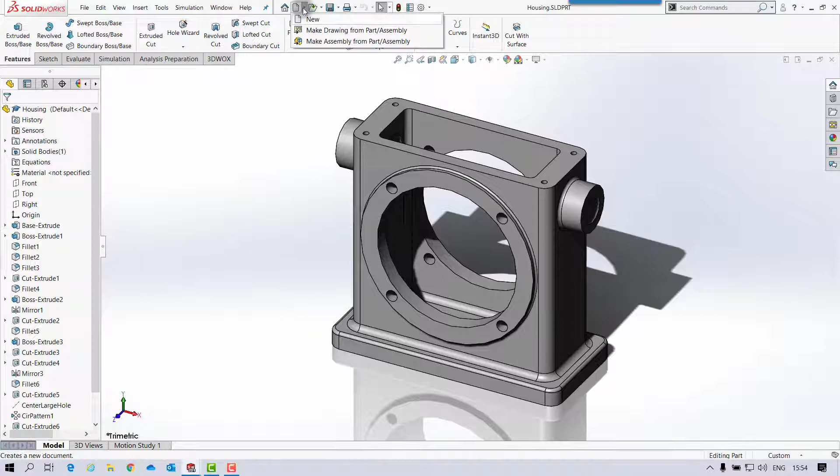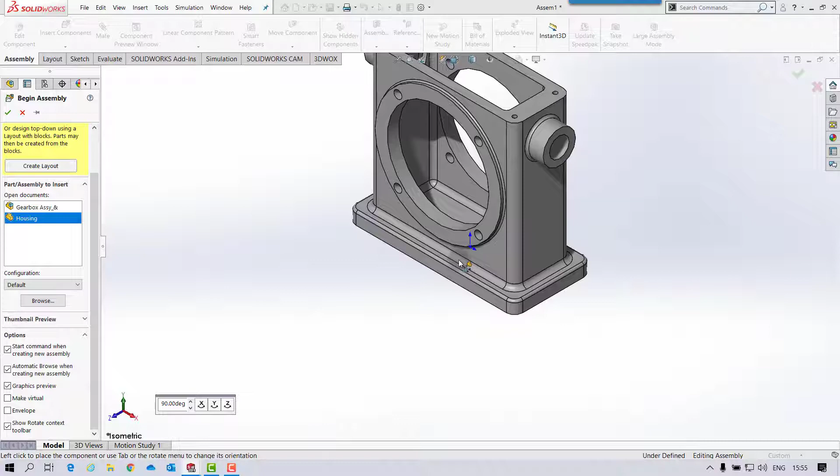Exercise 56 on page 455. Here we have to open up the housing part and create a new assembly from that part. So I've opened it up and I'll make an assembly from part. It's a metric assembly, so in the SOLIDWORKS templates tab, click on assembly mm. Now you'll notice I can't see the part, so I'll turn on the graphics preview, which is actually turned off in this particular template. You can click on the check mark and insert the housing in there, and it's fixed at that location.

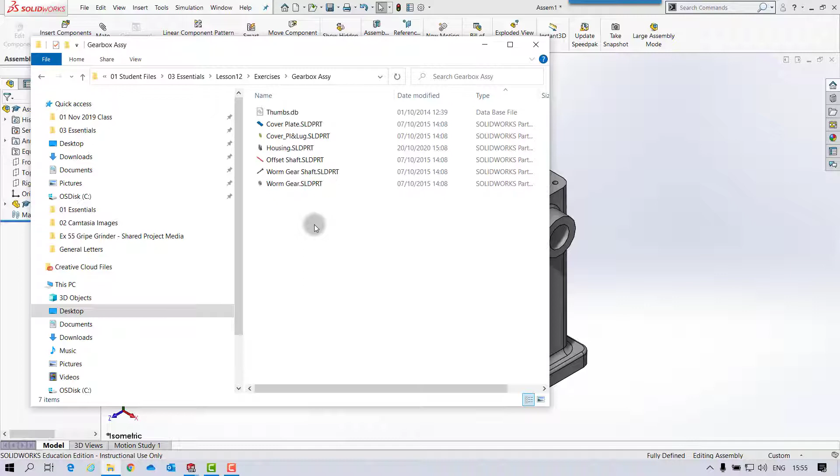Now we're going to drag and drop a few parts in as well, so I'll do it with the folders. Get the parts from in here. I need the cover plate, and this one here, and I need a couple of those, and I might as well bring the rest in while I'm doing it, and the worm gear as well. So that's my components, and we'll do it in the order that the book says.

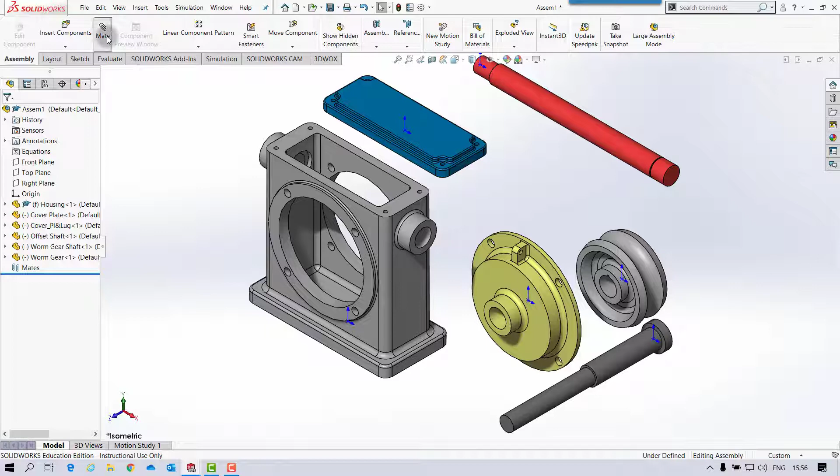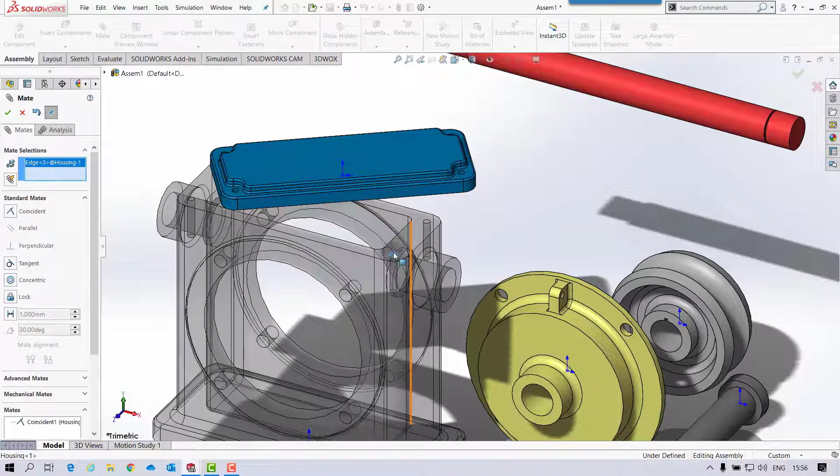It probably isn't the most efficient way to model it, but the idea of this is to show you how to use the hide and show component command. So let's do it the way it is in the exercise. We're asked to put this one on top first. You can mate it with normal mates, but you've got the holes there, so we might as well make use of those. If I select the edge of that circle, zoom in and get that, and make that coincident. I'll throw that off a little bit and do the same again on this one, saving you doing 3 mates, so you just get 2 mates.

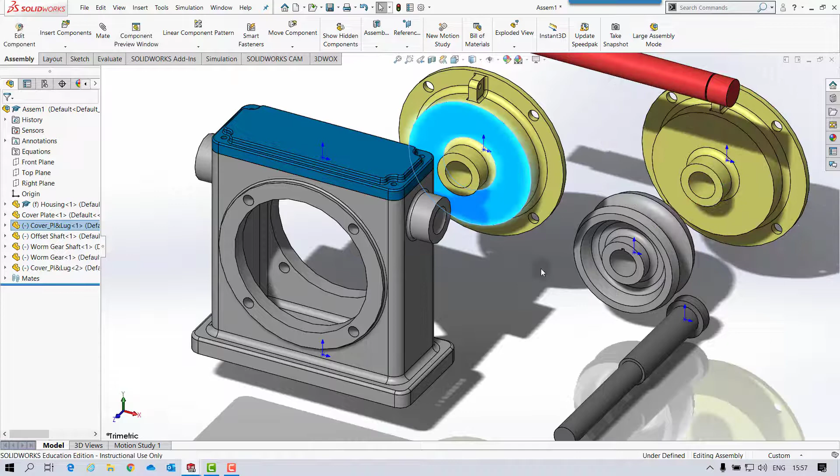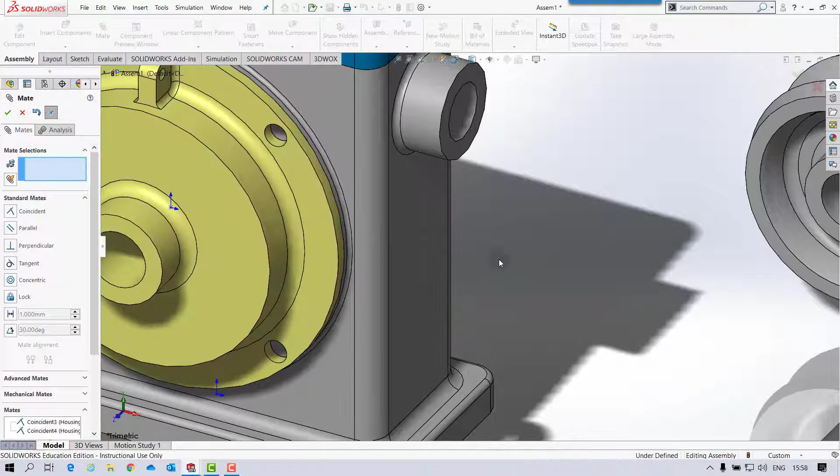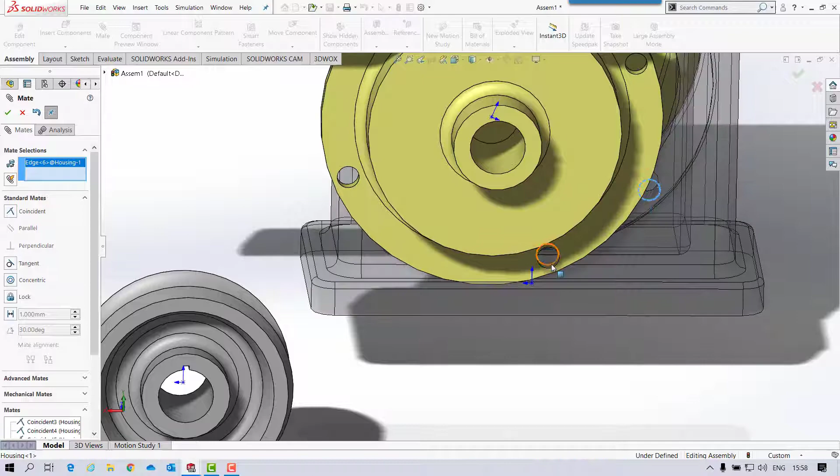Trimetric. I'll create a copy of this first. I'll select the mate and select the back edge and that edge there. Again you can do that, and I'll pick that. Not sure I got the right edge, so I'll do it again just to be sure. I think I did, but just in case. Make that coincident there. Same on the back then, just zoom in so I'm getting the right edge. So there, and if I just flip it around, then same again, pick that and line that up like that.

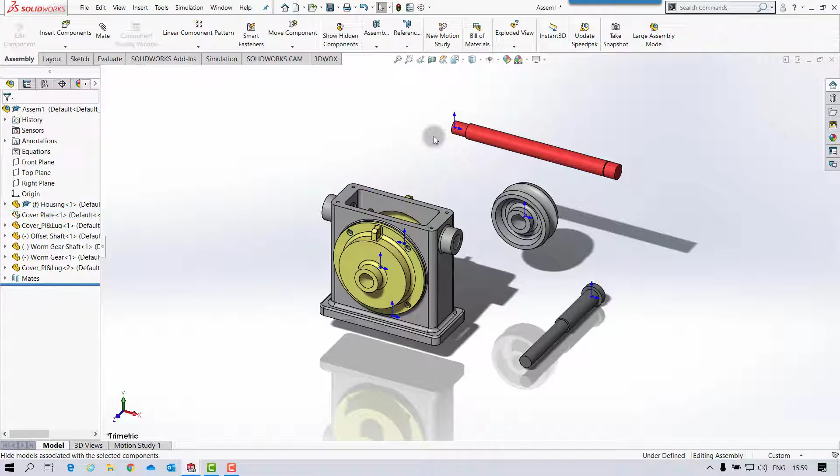Now, this was done before putting this bit in, so you could see the hiding of the component in this. We're asked to hide the top cover plate so we can see this when we're putting it in. Just select that, the top cover plate, and we can hide components. Then I get to see in here, so I can easily fix this one in. Just put a little mate in that center there, and line it up with that. Make them concentric, so you can see it's concentric at that.

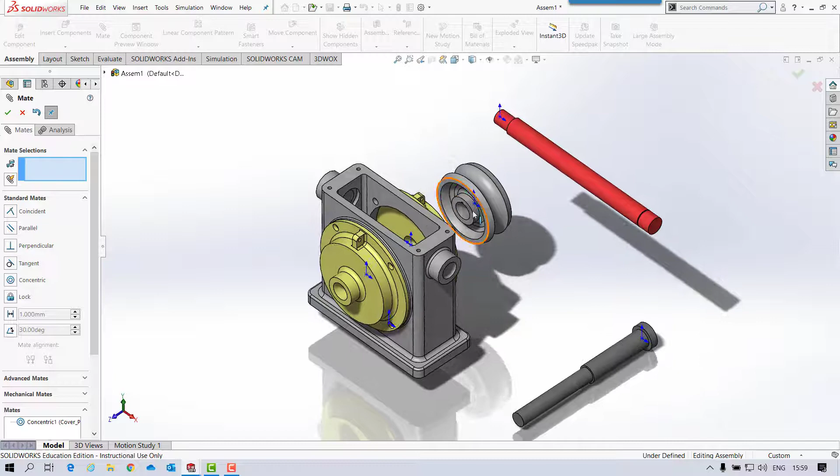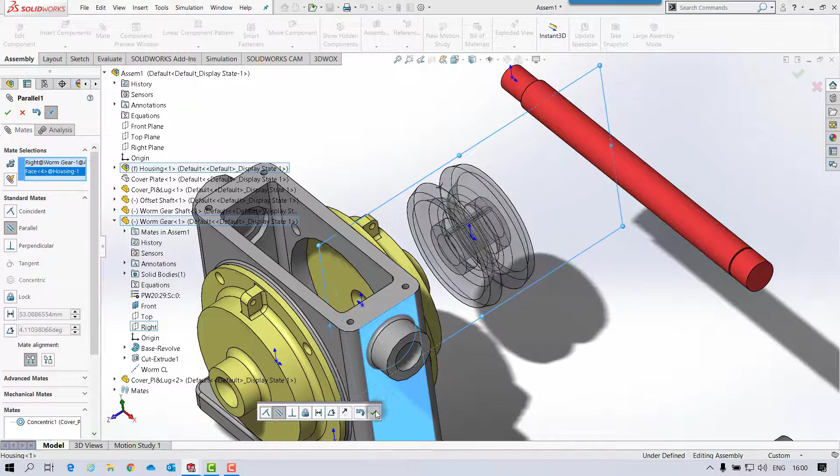What I'll do as well, I don't think it asks for it in the notes, but I'm going to make this fixed to the top as well, by selecting the plane - that right hand plane that's running down that little keyway on that. I'll make it parallel maybe with that side, so that's kind of locked in that up position, if you like. And then just do the advanced mate then.

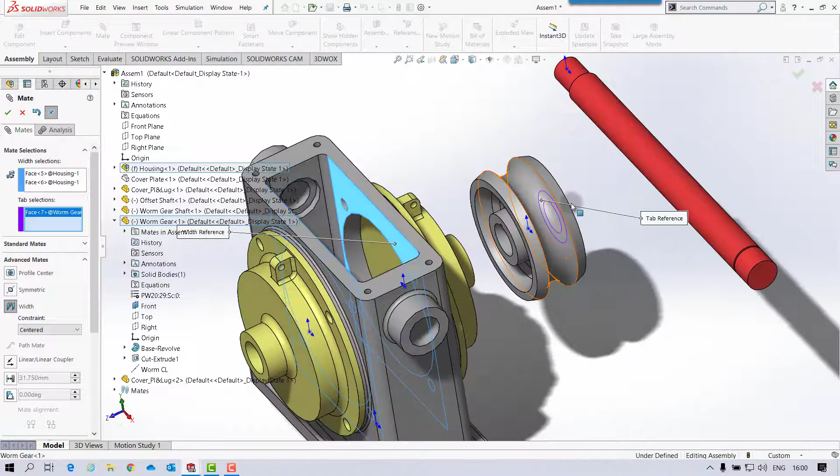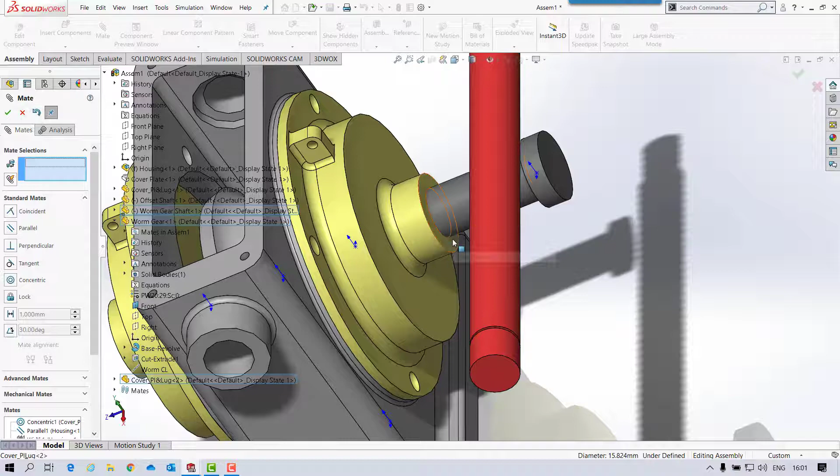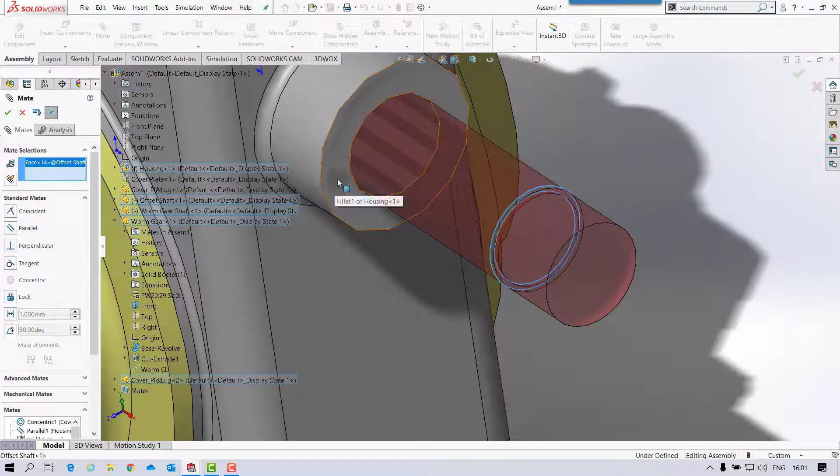Select the width mate, and I can select that face and that face, and then select that face and that face. And that's our part in there. Then just pop it in this shaft, concentric, and then that face and that, and it's that, and then this one again, make it concentric, and then the little clip groove there is flush with that face. So we make that, and that's us done.